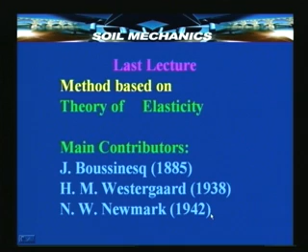We also saw how to compute stresses due to a concentrated load, through two broad approaches: one which I called the approximate method, and another the so-called Boussinesq solution. In the approximate method, we assumed that soil is a particulate material.

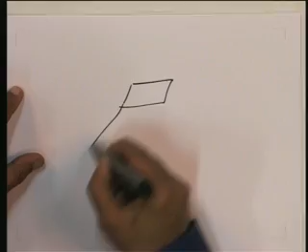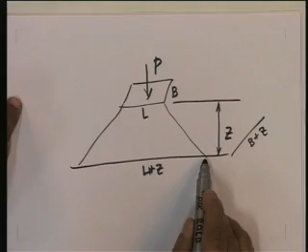The stress from the foundation gets transmitted to the soil through the grains, and in that process it disperses. If this is the foundation, the soil distributes the stress, and at depth z, the area over which the stress gets distributed is no longer length into breadth, but length plus depth into breadth plus depth.

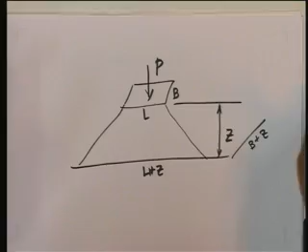So if there is a load P here, it gets uniformly distributed over this area of L plus Z into B plus Z. This is an approximate method because the actual line representing the boundaries of the distribution area is approximate. On the other hand, the Boussinesq solution takes a different approach, based on theory of elasticity. Let us see in today's lecture how to use Boussinesq's approach for computing stress distribution due first to a point load and then to a line load.

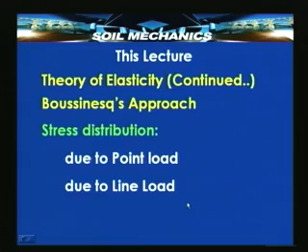Let us briefly recapitulate what theory of elasticity is all about. Although we covered it in the last lecture, it is necessary to go through this briefly so we can appreciate Boussinesq's theory better. We started with the assumption that soil is a semi-infinite medium, or half space. It is a continuum, meaning there is no break, although the medium consists of granular material with distinct boundaries between the grains—we assume this to be a continuum.

Next, we assume the medium to be homogeneous. The advantage is that every element of the medium is similar to any other element. If we understand the behavior of one element, we can extrapolate it to all other elements and hence to the entire half space. That is the idea of assuming homogeneity.

It considerably simplifies the problem. In nature, of course, it may be difficult to find perfectly homogeneous material. We will see later on how best non-homogeneity, or inhomogeneity, can be included. We also assume that the soil has equal properties in all directions, that is, isotropic.

Most importantly, we assumed that the soil has no weight, meaning there were no initial stresses and no initial deformation. The idea is that we will be able to calculate the stress in the medium purely due to the applied stress from a foundation. The self-weight of the soil, which contributes a stress by itself, can always be computed if we know the depth and the unit weight of the soil, and therefore theory of elasticity need not be used for computing the stress due to the weight.

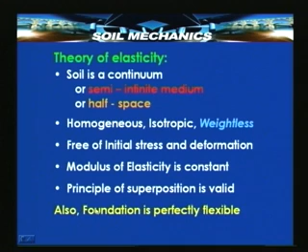In all this, we have also assumed that the foundation is perfectly flexible, so that the contact pressure at the interface between the foundation and the soil is uniform.

All these assumptions and their importance have been laid out very clearly both in the last lecture, and I have emphasized it again this time.

Now, are they really applicable? A question automatically arises in the mind: are we oversimplifying the problem? Are we justified in making these assumptions? Are they really acceptable? Well, to some extent they are acceptable.

To a great extent, application of this theory in practice has vindicated our stand that it is reasonable to assume the soil to be homogeneous, isotropic, a continuum, and also elastic in nature.

You can say that the validity of these assumptions used in the method of computing stresses has been borne out by trials in the field, and therefore we can justifiably say that the method can be used with reasonable confidence in practice.

However, it must be noted that there can be deviations from the conditions which have been assumed. If there are deviations, we shall have some approximate way of accounting for those deviations, using as a basis the expressions which we will be deriving from these assumptions.

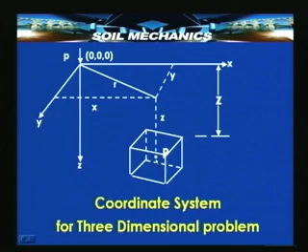This is the coordinate system that we shall be using, and this is the load P, known as the point or concentrated load, due to which we are interested in finding out what the stress at point P is. We were taking a look at the fundamentals of the theory of elasticity yesterday.

The theory of elasticity assumes 4 or 5 major tenets. Number 1, it says that the material is in equilibrium. A typical element inside the soil is in equilibrium under the action of the stresses which are acting on it.

Now, this is an essential and justifiable condition, because in practice we want safety. We want the element to be in equilibrium, so that the foundation will be in equilibrium and hence the superstructure. Therefore, it is a perfectly valid requirement that equilibrium must be satisfied by the element for the set of forces or stresses acting on it.

Now, we have seen in one of the diagrams earlier that every surface of this parallelepiped is subjected to 1 normal stress and 2 shear stresses.

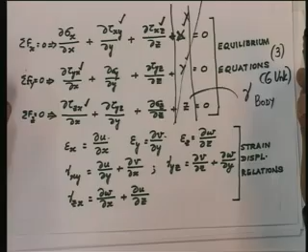Now, if we calculate the forces on each one of these planes and write down the well known equations of equilibrium for sigma Fx equal to 0, sigma Fy equal to 0 and sigma Fz equal to 0, this is what we get. You can see here I have written 3 equations. One of them says sigma Fx equal to 0, and you find it has a term which is the rate of change of sigma x in the x direction.

Then the rate of change of shear stress tau xy in the y direction, rate of change of shear stress tau xz in the z direction, plus a so-called body force X in the x direction. This is a force per unit volume, which I mentioned yesterday.

Now, if we write equations for sigma Fy equal to 0 and sigma Fz equal to 0, we get similar equations. All these three together constitute the so-called equilibrium equations of a typical three-dimensional problem of stress distribution.

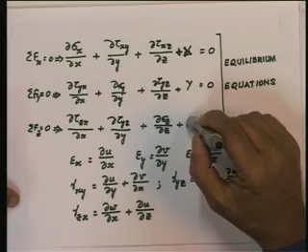In this, if z is the vertical direction, Z in fact represents the force in the vertical direction per unit volume of the soil, which means it is nothing but the weight per unit volume of the soil, that is, it is nothing but gamma of the soil.

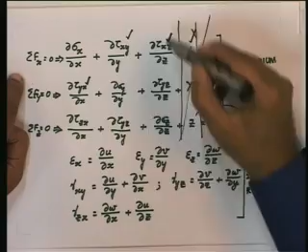Now, you will see here that there are 3 normal stresses, 6 shear stresses, but if we write and solve the moment equilibrium equations, we will find that tau xy is same as tau yx, tau xz is same as tau zx. We will also find that tau yz is same as tau zy, which means effectively we will be having 3 normal stresses and 3 shear stresses which are unknowns. We have 3 equations,

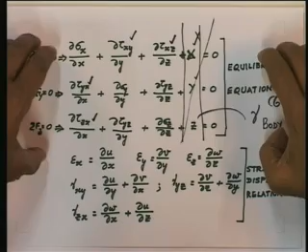but we have 6 stresses which are unknowns. So, 6 unknowns, 3 equations. Obviously, equilibrium condition alone will not help us to calculate stress distribution, because we have a lesser number of equations and a greater number of unknown stresses.

Therefore, we need to consider some other condition as well, and that is why we went yesterday also to the second condition - if you see this slide, which is the strain displacement relations. What are these strain displacement relations?

I had explained yesterday that if any typical surface of the parallelepiped is considered, it elongates as well as distorts. So, there will be normal strains as well as shear strains. So, in a parallelepiped, on every surface there will be 2 normal strains and 1 shear strain.

And therefore, in a 3-dimensional problem, we will have normal strains epsilon x, normal strain epsilon y, normal strain epsilon z, and also distortion or shear strains, which are nothing but variation or deviation in the angle where the original value of the angle was 90 degrees. So, the change in angle of an original 90-degree angle is what is known as shear strain.

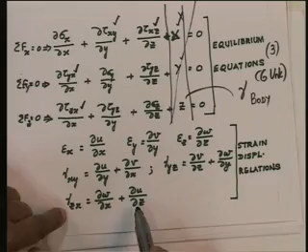It can be shown from geometry that the shear strain will be equal to this in the xy plane, in the yz plane this, and in the zx plane this. Now, you will find on the right hand side of all these equations, there are notations such as u, v, w. These are nothing but displacements. So, effectively now we have strains and the displacements related to each other.

After all, strain is nothing but displacement by original length, or change in length by original length, and therefore strain displacement relationships can be expressed as epsilon as a function of u, or v, or w, and that is what we have. Now, if you see this, once again we have 6 equations, and how many unknowns are there?

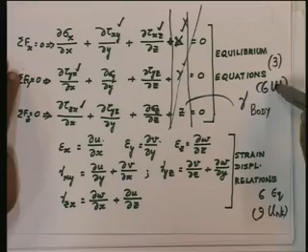There are of course 6 strain components, but the displacements are also unknowns, and therefore we have 9 unknowns. So, we have 3 plus 6, 9 equations; we have 6 plus 9, 15 unknowns. Obviously, we are therefore not yet ready to solve this problem completely to obtain the stresses.

Not only that, in the second set of equations which we have written down, there are no stresses. That means there are additional unknowns coming into the picture in the form of strains and displacements. Actually, therefore, these 15 are the unknowns of this problem. It is not only the stresses, but the strains and the displacements are also unknowns.

Primarily, of course, in this chapter which we are discussing, we are interested in the stresses, and therefore our basic unknowns are the stresses. However, we need to solve all these equations in order to arrive finally at the stress values. There are obviously an inadequate number of equations compared to the number of unknowns. Therefore, we need to look for some additional conditions, but without increasing the number of unknowns, and that is what really theory of elasticity does for us.

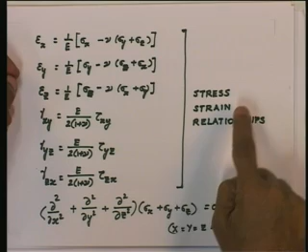Let us see the next transparency. Take a look at this. Here I have written down the stress strain relationships. Actually, in the previous two sets of equations, there was really no theory of elasticity coming into the picture. It was all equations pertaining to the equilibrium or the deformation of a typical element in the medium, in a continuum. Theory of elasticity really enters the picture now.

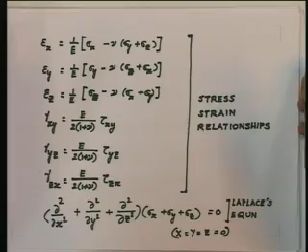Now, if you see, the first equation is nothing but strain on the left hand side, modulus of elasticity, and all the stresses on the right hand side. Poisson's ratio also is included. This equation is extremely simple to understand and derive.

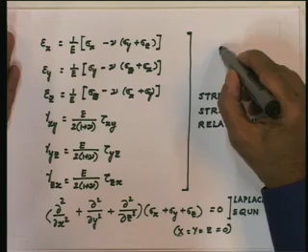Any strain in any direction, we know according to theory of elasticity, must be equal to the stress divided by the modulus of elasticity. I am simply assuming that stress is linearly proportional to strain, or in other words, sigma equals some constant which I am calling the modulus of elasticity into the strain. Now, epsilon x is the strain in the x direction.

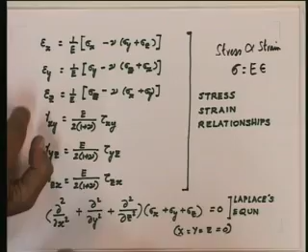It must therefore obviously get a component from the normal stress sigma x, which is also in the same direction as epsilon x. So the component contributing to normal strain epsilon x in the x direction will be sigma x upon E.

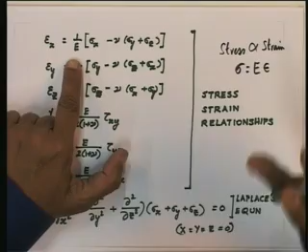But when we are dealing with an element, if sigma x is contributing to a strain epsilon x, due to the Poisson effect, due to the Poisson's ratio of the material, this material, if it undergoes compression in the vertical direction, it will undergo elongation in the lateral or horizontal direction, which means this is also going to affect the strain in the horizontal direction.

If this stress sigma x is affecting the strain in the x direction due to the Poisson effect, it will also affect the strain in the y direction. Now conversely, the stress in the y direction will affect the strain in the x direction through the Poisson's ratio, and that is what we have written here.

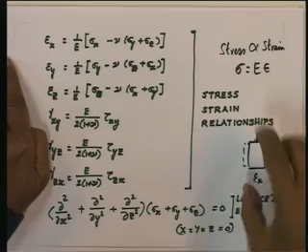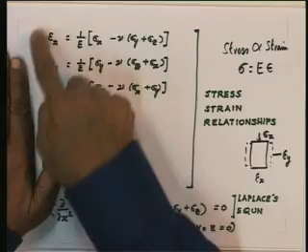We have seen that if there is compression in the vertical direction, there is elongation in the horizontal direction. Similarly, if sigma x upon E is a positive contribution to epsilon x, the contribution from sigma y through Poisson's ratio, and the contribution from sigma z to epsilon x, will both be negative. So the strain-stress relationship for epsilon x in terms of the three unknown stresses will be like this.

Now we have to appreciate that we have succeeded in creating an equation based on theory of elasticity, in which we have not introduced any new unknown. The unknowns are sigma x, sigma y, sigma z, and epsilon x, which were also there in the previous equations. The constants E and nu are material constants, supposed to be known and constant. We can determine E and nu in the laboratory through certain tests, and therefore they are not unknowns.

If we now go to the strain in the y direction, an identical equation can be written in terms of sigma y, sigma z, sigma x. Similarly for the strain in the z direction.

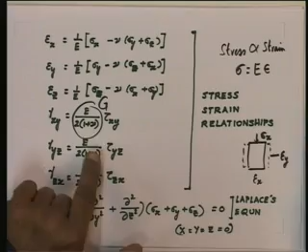Similarly, by a similar argument and assumption of linear elasticity, we can say that the shear strain in the plane xy will be governed by the shear modulus G into tau xy, where tau xy is the shear stress. This G can also be expressed in terms of the modulus of elasticity and the Poisson's ratio as E upon 2 into 1 plus nu.

This can be continued further, and we can write similar equations for gamma yz and gamma zx. These constitute the stress-strain relationships. Now we are in a comfortable position to solve the problem of stress distribution, because we have not introduced any additional unknowns here, and our number of unknowns remains the same as before, that is 15.

Whereas we had 9 equations earlier, we now have 6 additional equations, which means we now have 15 equations and 15 unknowns. These can therefore, theoretically speaking, be solved in order to get the stresses.

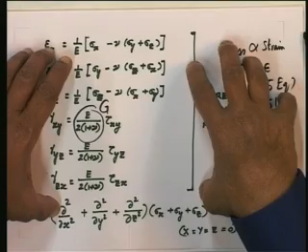Once we get the stresses, we have the stress-strain relationships right here in front of us. If we know the right hand side, we can always calculate the left hand side, and if we know the strains, we can always calculate the displacements. So this approach can be used to completely solve the problem of not only stress distribution, but also strains and displacements, which are also unknowns in a typical problem. This is the set of equations which theory of elasticity attempts to solve.

If you try to solve the 15 equations step by step, you can finally arrive at a condition known as Laplace's equation. I shall not be going into the details of this.

You can always obtain the details of the solution process from any book on theory of elasticity. Now, this equation is known as Laplace's equation. The left hand side consists of second derivatives of the stresses, and the right hand side is 0. We have made an assumption that the body forces X, Y and Z are 0 here. If the body forces are 0, then we have a Laplace's equation.

It may be worthwhile mentioning, although I shall not go into details, that if the body forces are not assumed to be 0, we can still solve the problem. Then on the right hand side we will have a non-zero term, and the equation will then be known as Poisson's equation. However, we are interested in the problem of stress distribution using the method of Boussinesq, and we shall confine ourselves to that main assumption which he has made and the corresponding equation.

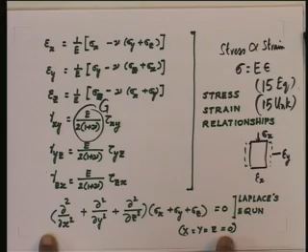The main assumption, if you remember, is that the medium is weightless, and therefore the equation that shall apply in our condition is the Laplace's equation. How do we solve this Laplace's equation to get the unknown stresses? As I said, once we solve this and get the unknown stresses, we can always go to the stress relationships, get the strains, and then the displacements. So let us see how this is solved.

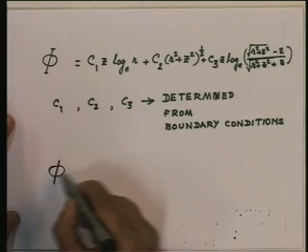I may not be in a position, or it may not be required, to go into the elaborate details of solving the Laplace's equation. I will just mention that the Laplace's equation is solved by defining a so-called stress function. This function phi which you see here is known as Airy's stress function.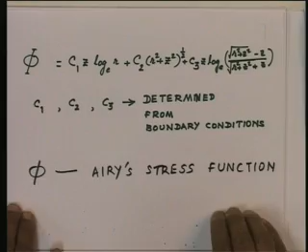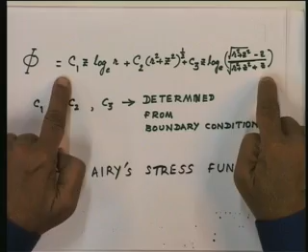This Airy's stress function is a function which tells you what the stresses are in a medium and how they are distributed in terms of an equation like this. Now, this equation has been derived by Boussinesq for those 15 equations which we had considered earlier, and the special property of this function phi is del 4 phi equal to 0.

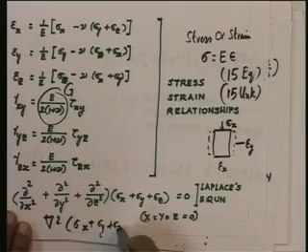Now, if you remember, let us take a look once again at the Laplace's equation. This Laplace's equation can also be written as del square of sigma x plus sigma y plus sigma z equal to 0, where this del square stands for the sum of partial derivatives del square by del x square, del square by del y square, del square by del z square, but this is of the second order.

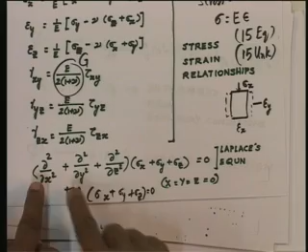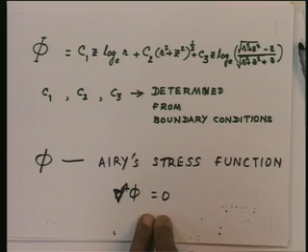On the other hand, this stress function phi satisfies the condition del 4 phi equal to 0, that means the fourth order derivatives come into picture. Fourth order derivatives of this function phi equal to 0. This has been shown in the theory of elasticity that this will satisfy that Laplace's equation.

This will serve as a function of position, a function of the coordinates r and z of this form, which will satisfy the condition del 4 phi equal to 0, and will also satisfy the Laplace's condition which we saw earlier, meaning this is a valid solution and will give us the stresses. From here the stresses have been obtained by Boussinesq. Now you see here there are constants C1, C2, C3.

Now, the solution which we have derived or evolved so far has not considered any specific problem. Although I have been saying that we are interested in the stress distribution problem, up till now we have not specified what the stress distribution problem which we are considering is. We have not stated whether it is a problem of a wheel load on an embankment, a dam sitting on a rock foundation, a foundation problem, or a tunnel problem.

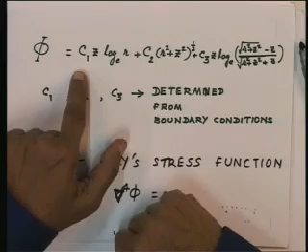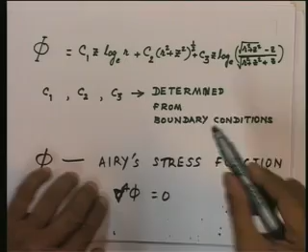This means that up till now whatever solution we have evolved is a very general solution, and therefore it consists of certain constants, and these constants will vary from problem to problem, and thus the same solution will apply to different problems. However, in each problem there will be a different value of the constants C1, C2 and C3, and these are all determined from the specific boundary conditions of that particular problem.

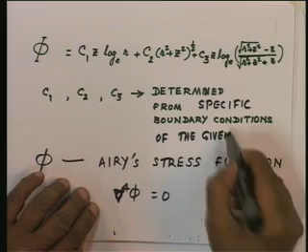I am not going into the details of all the boundary conditions, but just to illustrate, one boundary condition which we can easily appreciate is that on the surface of the medium there is no vertical stress. That means at z equal to 0, where z is the depth, on the surface there are no stresses, sigma z is 0. So that is a boundary condition, an example of a boundary condition.

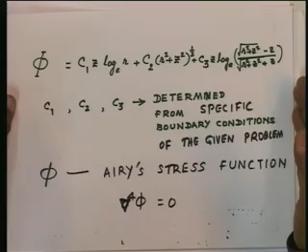There will be other boundary conditions as well, and all these are taken into account, and Boussinesq has arrived at a solution for the stress distribution problem in general of this shape. Now lastly, I have mentioned something known as compatibility condition. Let us take a look at what these compatibility conditions are.

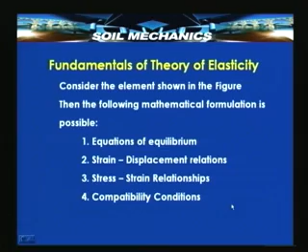I have just stated that this is a general solution valid for all problems of stress distribution, irrespective of whether it is a tunnel or a retaining wall or a dam. Then one condition which must be inherently satisfied is that when under these stresses, strains and deformations or displacements take place, our basic assumption of continuum should not be violated.

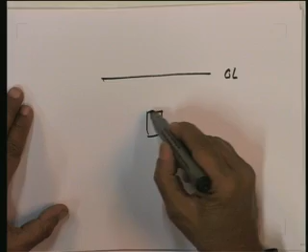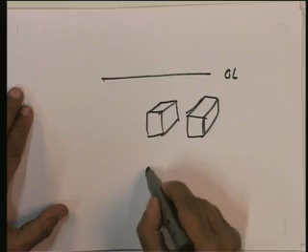What it means is, suppose I take this surface of the soil, suppose I consider this element, actually it is a 3-dimensional element like this. Suppose I also consider the adjacent element - actually these are so-called contiguous elements, meaning they are adjacent, touching each other. However, for convenience in imagination, I have drawn them as two separate elements.

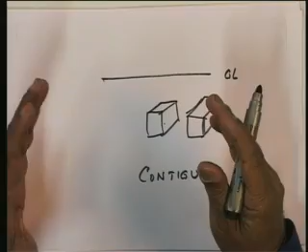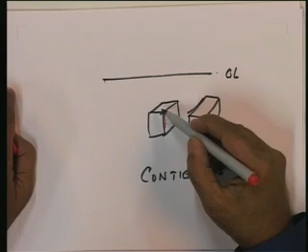Now, when these two elements are adjacent elements, when each element undergoes some strain or deformation, if this material has to remain as a continuum, then there must be some relationship that must exist between the strains and the deformations of the two elements. Otherwise, suppose this undergoes a strain and takes a shape like this, and this takes a shape like this - obviously there is a loss of contact between the two elements. That means these two strains are not compatible.

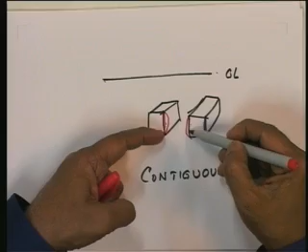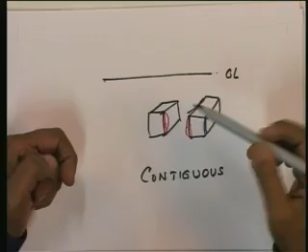Now you can extend this concept at 3 levels, that is along this surface and along this surface. At this corner and this corner, and at all points, the displacements must be similar or equal, so that the two surfaces remain in contact. Then from this point to this point, if there is a variation in displacement here, that means if there is a strain, then the strains must be the same in both.

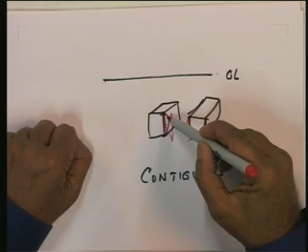On the other hand, it is not enough if only strains are the same. If this now undergoes a deformed shape like this, then the slope of the deformed shape at every point must also be equal to the slope of the deformed shape of the other corresponding surface, and also the curvature of this surface must be the same as the curvature of this surface.

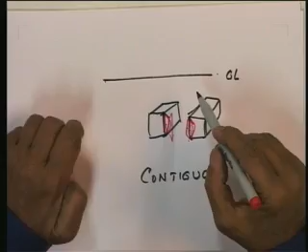Now all these are stated mathematically, and a set of conditions known as the compatibility conditions have been derived in the theory of elasticity. I am not going into the details of all those equations and how they have been derived, but suffice it to understand that complete compatibility between adjacent elements in terms of strains, displacements and curvatures has to be maintained, and that is possible provided we satisfy the compatibility conditions. So a typical theory of elasticity solution will consider equilibrium equations, strain displacement relationships, compatibility conditions, and then solve and get the value of stresses through the Airy's stress function.

So if you look at this slide, you find that our basic attempt is to derive the Laplace's equation and then to use the stress function approach to get the stresses. Now this is precisely what has been done by Boussinesq.

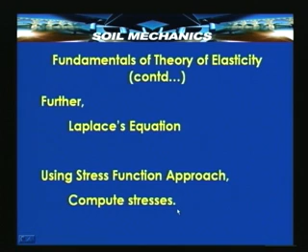It is 3P z cube upon 2 pi L to the power of 5, or 3P by 2 pi into z cube by r square plus z square to the power of 5 by 2. That is 3P by 2 pi z cube by r square plus z square 5 by 2, where r is nothing but square root of x square plus y square, and L is nothing but square root of x square plus y square plus z square, or square root of r square plus z square.

What do these mean? Here you can see this is x, this is y, this is z, and r is nothing but this distance.

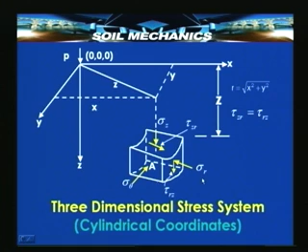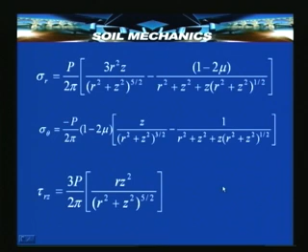Now the parameter mu that comes here is nothing but the Poisson's ratio. Let us see the next slide. This slide is of importance.

This talks about the vertical stress sigma z. If you look at the expression for sigma z, you find that capital P, the load applied, is a constant, 3 by 2 pi is a constant, and r and z are the coordinates of any point at which we want the stress, where sigma z is equal to this. Therefore, we can express this sigma z in terms of some constant quantities, and in terms of quantities like r and z which vary in the medium depending upon the point of interest.

So if you rewrite this equation in the form sigma z equal to P upon z square into a parameter called If, or influence factor, that influence factor, if you compare these two, will turn out to be equal to If equal to 3 upon 2 pi into 1 upon 1 plus r by z whole square raised to the power of 5 by 2.

This influence factor is nothing but a factor which includes the constant terms 3 and 2 pi and the ratio of the coordinates r and z. If we can evaluate this If, or the influence factor, for different ratios of r and z, then we have a way of generalizing the stress computation problem.

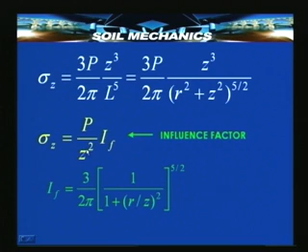In addition, if you go back to that equation, you find that it is not only the influence factor which goes on decreasing with r by z and therefore, brings down sigma z. Sigma z is a fraction involving P and z square, which means it is inversely proportional to z square, so as depth increases sigma z goes on decreasing as a function of the inverse of the square of distance. That means it decays very rapidly. Although we go down by a distance z depth-wise, the stress decreases by a magnitude of z square. There is an inverse square formula in operation, and sigma z, both laterally and with depth, will go on decreasing, but you will also find that up to a certain distance initially it will increase and then decrease, which we shall see now.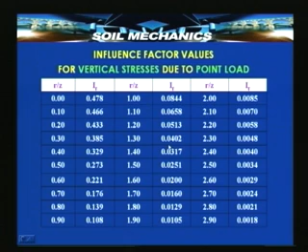This is a table of the r by z values and influence factor. This table conveys a lot of important information. For example, if we put r equal to constant, how does the stress vary? Or if we put z equal to constant, how does the stress vary? Or which are the points, irrespective of different r by z, which will experience the same stress or have the same influence factor? This we can analyze as follows.

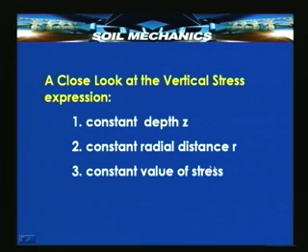If you take a close look at the table of vertical stresses which I showed you, we can analyze the effect of the variation of z, the variation of r, and how the stress itself varies. A close look at the vertical stress expression will tell us at constant depth z what happens to the stress values, at constant radial distance r what happens to the stress values, and what constant stress values will occur where. Take this table. I have given here once again the influence factor and the expression for sigma z in terms of the influence factor.

Now I am going to consider, at constant z, the effect of r. I am taking a constant value of z, and at that constant z, as r increases, how the influence factor varies and how the stress varies. Suppose we start with r equal to 0. At r equal to 0, the influence factor can be computed to be equal to 0.4775, and as I mentioned earlier, at r equal to 0 the maximum stress occurs. So here, at r equal to 0, the influence factor is 0.4775 and the maximum stress that occurs is P upon z square into 0.4775.

Whereas at the same depth z, as the value of r changes from 0 to a higher and higher value, we find that at constant z and varying r, at r by z equal to 0.5, the influence factor reduces to almost half this value and the stress reduces to a little more than half of the maximum. When r by z is equal to 1, that is r and z are equal, the influence factor sharply drops to a very low value of 0.0844, and the stress also reduces to a very low value of 0.177 of the maximum value occurring at the surface. At r by z equal to 2, the influence factor further drops down and the stress becomes 0.018 times the maximum stress.

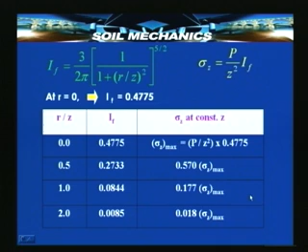Now, from this table whatever we are able to figure out can be understood better from a graph. Take this graph: there is this load acting at the center here, these are the x and z coordinates. I am taking a constant z and different values of r. At different values of r, I have just shown you that the influence factor goes on decreasing as you go away from this point, and therefore the stress goes on decaying. This is a typical stress distribution at a constant value of z. This is very useful—it shows that the effect of the load, fortunately for us, does not go on extending to very long distances. It starts decaying after a reasonable distance and becomes very close to a value of almost 0 at a reasonably short distance.

Now, what this means is, if two foundations are kept side by side at a reasonable distance, the influence of one foundation may not affect the stresses due to the other foundation. This is an important idea. It shows that if two foundations can be spaced such that one does not affect the stresses due to the other, then the soil will not be subjected to unduly excessive stresses.

Just imagine I have one more foundation and one more concentrated load very close to this, then that will also have a distribution like this, which means there is an overlap between the two distributions due to the two concentrated loads. There is a zone which will experience stresses due to both loads, and therefore the total stress that zone experiences will be almost double the value of the stress due to one of the foundations.

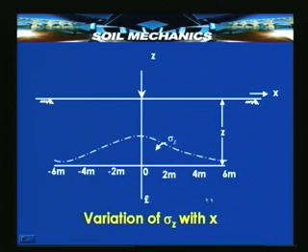Now, we shall try to understand what happens to the influence factor and the stress at constant r, but varying z. As before, this is the expression for the vertical stress, where this 3 by 2 pi term represents the influence factor. Now, if r is constant here, sigma z will vary with z.

How does it vary? We can see that as it varies, somewhere it has got to be maximum or minimum. In order to find out where sigma z reaches its maximum value with respect to z, we can differentiate this expression with respect to z.

D sigma z by dz can be put equal to 0, and if you differentiate this with respect to z and put it equal to 0 and solve for r upon z, you will find that r upon z is nothing but 0.817. That means sigma z becomes maximum as we go down at an r by z value given by 0.817, or by a line which makes an angle theta equal to 39 degrees 15 minutes.

Now, at this value of r by z, the corresponding maximum value of stress will be sigma z max equal to 0.0888 into p by z square.

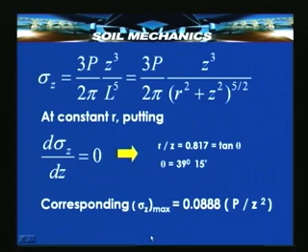That is the influence factor, which means the vertical stress sigma z reaches a maximum value at some depth. This implies it is not the maximum value at other depths, and this is interesting, as I pointed out in an earlier lecture. The vertical stress first goes on increasing with depth, reaches a maximum value, and then drops down again, luckily for us. At very great depths the stresses will be decaying and will have less than the maximum value. Let us see the next slide.

This slide shows how the vertical stress varies with depth at constant r. Let us say these are the two axes. Take a distance r, this is z, this is r. So if I draw a line of r by z, this is what that line will look like.

If at a constant r given by this line, I try to plot the value of sigma z computed by the previous expression, I will find that sigma z has some value at z equal to 0 and will gradually go on increasing, reach a maximum value at some value of z, and then again decrease and become almost steady as we reach a very high value of depth.

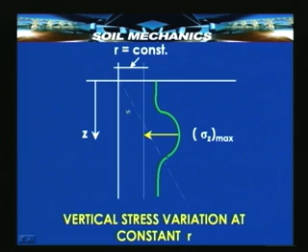This line, giving the ratio r upon z, will have an inclination theta given by the expression in the previous slide, that is 39 degrees 15 minutes. So in effect, the maximum value of stress will occur at a point which, when joined to the origin, makes an angle of approximately 39 or 40 degrees with respect to the vertical.

Lastly, let us take a look at how the stress varies in the medium, which are the points of equal stress.

The same equation for sigma z can be used, and if we calculate at different values of r by z, find out all those r by z values corresponding to which we get the same sigma z, and join all of them, we get what are known as isobars or pressure bulbs. This represents pressure in the form of a bulb, so we call it a pressure bulb. Since it represents a line of equal pressure, it is also known as isobar.

This figure represents that if I apply a load P, as I go down, 0.5 times the magnitude of P will be the pressure at some depth. As I go further down, it could reduce to 0.25 times the magnitude of P, and then at some depth it can become 0.1 times the magnitude of P, giving a stress per unit area roughly 10% of the magnitude of the applied load.

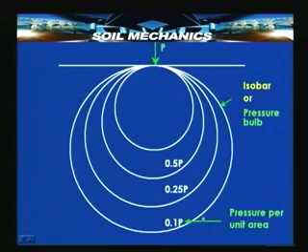What this signifies is that beyond this, the stress imposed by P is not much, almost insignificant. If we take 10% to be significant and anything less than 10% to be not very significant, which is a valid assumption in practice, then any pressure bulb beyond this, corresponding to a stress level less than 0.1 times P, may be unimportant from the point of view of influence of this P. The influence of P may well be assumed to be restricted to a pressure bulb defined by 0.1 P.

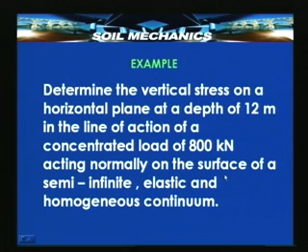Let us take a look at the next slide. This is the statement of a small example problem: determine the vertical stress on a horizontal plane at a depth of 12 meters corresponding to a concentrated load of 800 kilonewtons applied on a semi-infinite medium.

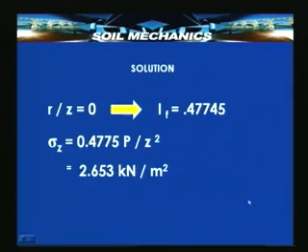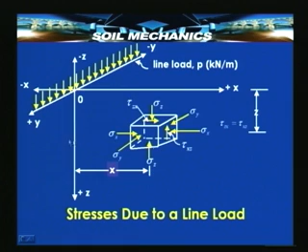This is the maximum value of stress due to the applied load in this problem, and by taking different values of r by z and corresponding influence factors, we can compute stress at different locations. This can be extended also to line loads. Line loads are nothing but uniformly distributed loads. Suppose we consider a line load of p kilonewton per meter, we can compute these stresses due to this line load by the same expression.

Only the expression will now be integrated for all the points along the line load, and if you do that, the Boussinesq expression for sigma z for a line load turns out to be 2p by pi into z cube by x square plus z square whole square.

So now if there is a line load of 400 kilonewton per meter at x equal to 5 meters and z equal to 5 meters, we get a value of sigma z from this expression equal to 12.73 kilonewton per meter square. See now how simple the computation of stresses has become.

Although we used the theory of elasticity, which involved solving a number of equations, luckily for us all those equations can be solved in a general manner and we arrive at simple expressions, so we need not solve those equations again and again. Those expressions and corresponding influence coefficients are sufficient to compute the stress, and by taking different values of x and z or r and z, we can calculate the stress distribution in the entire medium.

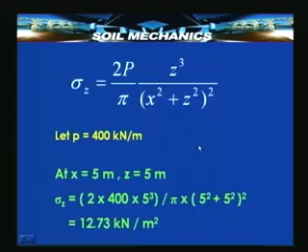Coming to the end of this lecture, we have seen the basics of theory of elasticity, the Boussinesq problem, and how it is used for computing stress distribution both due to a point load and due to a line load. We have also seen two simple examples of application of these expressions.

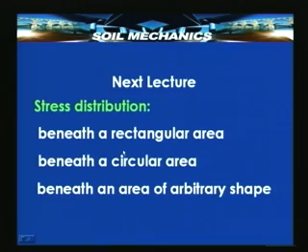Tomorrow, or in the next lecture, we shall see details of how to compute stress distribution below a rectangular area, below a circular loaded area, and below an area of any arbitrary shape. Thank you, that is all.